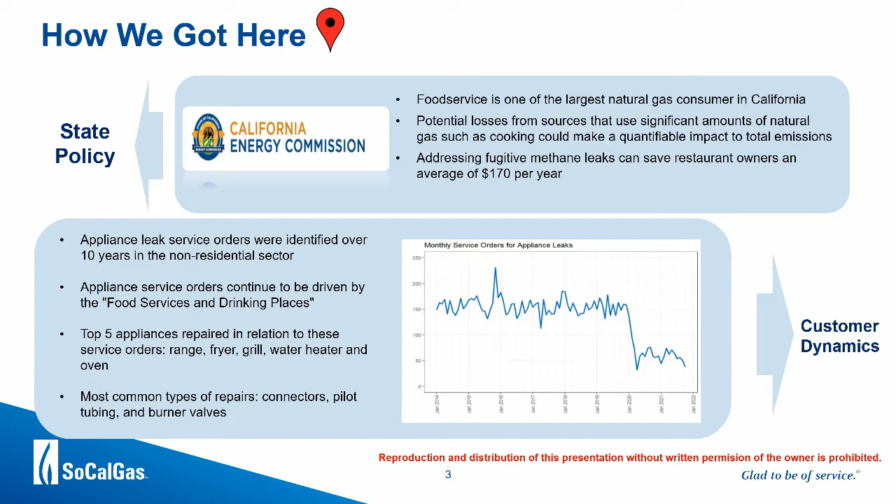So that was interesting. Going back to the CEC study, it shows that by addressing emissions in the commercial segment, particularly restaurants, while they're not a whole lot compared to other sectors probably, and I don't have that data, we can say there's a significant amount that this commercial segment or sector can save if we were able to address this.

So this slide basically proves how large or how important the restaurant customer is, and they do contribute a significant amount in terms of usage. We have a majority of them in LA County.

So what were we going to do knowing all this information? With that understanding, we've developed this plan, which is a proactive engagement to commercial restaurants. And how do we do that? It's about what are our goals or objectives?

It's about reducing methane emissions associated with gas leaks. It's about increasing efficient appliances and providing an incentive to those restaurants. And also offering an energy management tool that can help educate these customers to understand their usage and how efficient or inefficient their appliances are. This is basically doing it in a proactive way.

This is before something actually happens, you're addressing it right away. So in terms of identification, who would be qualified, or at least who we think would benefit from this effort, we developed a propensity model with the help of our consultant. We've identified restaurants that are more likely to request a service order associated with those appliance issues that I mentioned earlier.

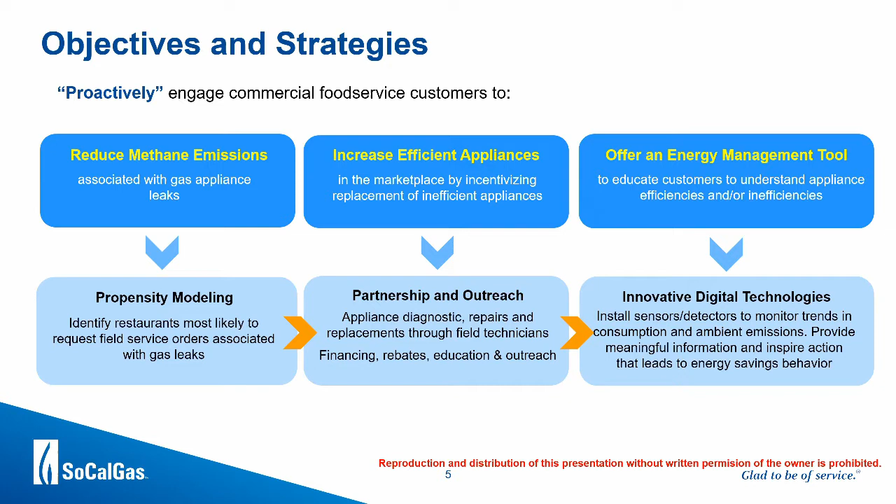So this project is not a one-team type of effort. It's actually a lot of groups and teams helping us put this together. It's a collaborative effort that supports our mission of clean, safe, innovative, and customer satisfaction.

I know this is a loaded slide, but it actually shows the process we're in. It's a step-by-step process. There are 4 steps here.

First is identifying those customers that are eligible to participate and inviting them to participate. Once invited, they are broken down into 2 groups: those with high propensity to have issues in their kitchen, and those with lower propensity to have an issue. The approach is a little different for each.

For the higher propensity group, we send our technicians to do a sweep test, identify issues, and repair those issues. We're offering incentives, benefits to the customer, wherein we're repairing it. We offer significant rebates and a financing option if there's a replacement needed for the appliances or equipment.

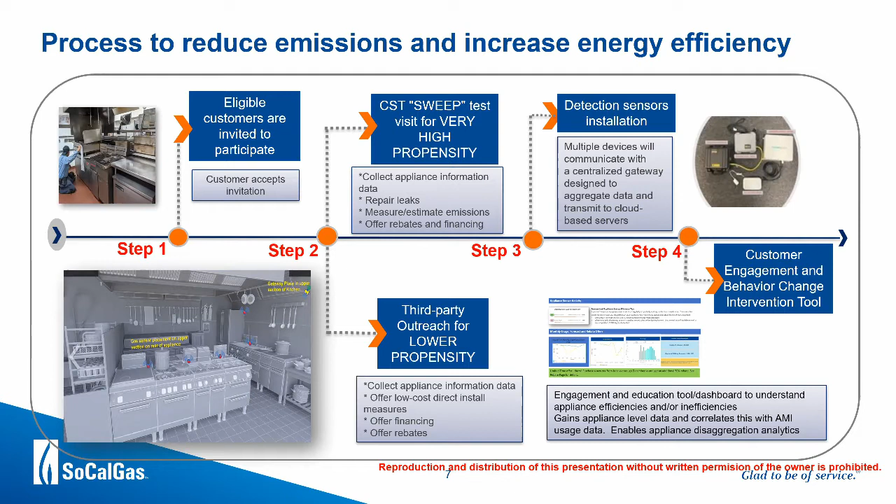So, milestone: currently we have 70 restaurants already enrolled in this project. You're seeing on the right-hand side an actual restaurant visit where we look at the kitchen. Our technicians go around the kitchen looking at the issues, doing a sweep test, and addressing these issues.

We've visited 10 restaurant locations with the field technician. 34 leaks have been identified, and the majority are basically coming from incomplete combustion, so there's a lot of maintenance these kitchens require. There are 21 natural gas appliances that we've repaired as of today, and 8 locations visited by a third party to offer low-cost measures.

The calculation here is preliminary, not finalized. We're working with several third parties to really establish and show how successful what we're doing is. I believe it's successful because, for one, we're detecting something that a customer didn't call us about. We're actually approaching them before they even call us, because they're probably not even aware of this.

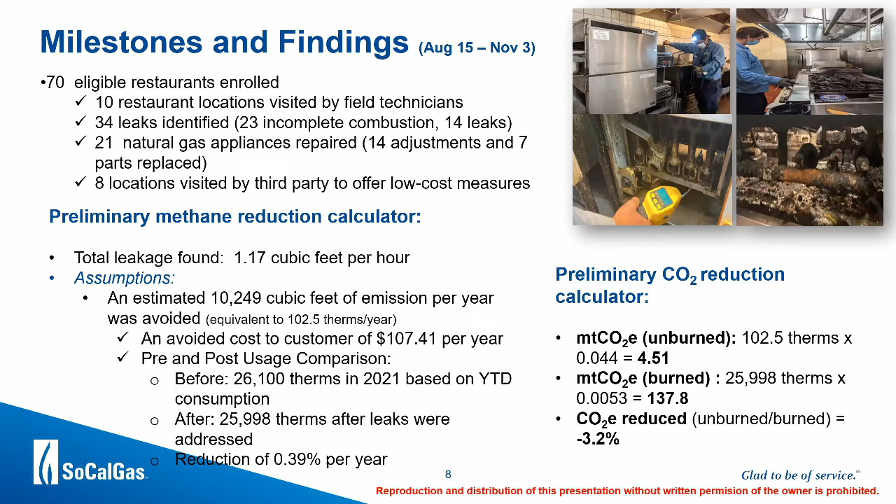This is a metric for success, because like any project, you want to march towards an end goal. Here's how we're looking at establishing it, or looking at whether this will be successful, since it is a test and learn project: quantifying the ambient methane gas emissions we've reduced, looking at usage, looking at the repairs we've done, and establishing the effects of goal setting or loss aversion.

For example, if a customer establishes energy saving goals and achieves them, they get rewarded for it. So there's more interaction. It's not just serving information; they're actually interacting with the information they're receiving.

It also enables us to enhance customer engagement and service. It's not a one-way communication but a two-way communication - delivering the information, they're interacting with it, and telling us also what we can do with that information. It's about the evolution of the model that we've developed.

So there's a lot of benefit also for SoCalGas: reducing leaks in the gas system, increased efficiency of customer equipment. This allows us to develop our business case to expand traditional energy efficiency programs as well, into the opportunity to pursue broader solutions. So this is innovative, and I'm proud to say I would think this is the first time this is being done.

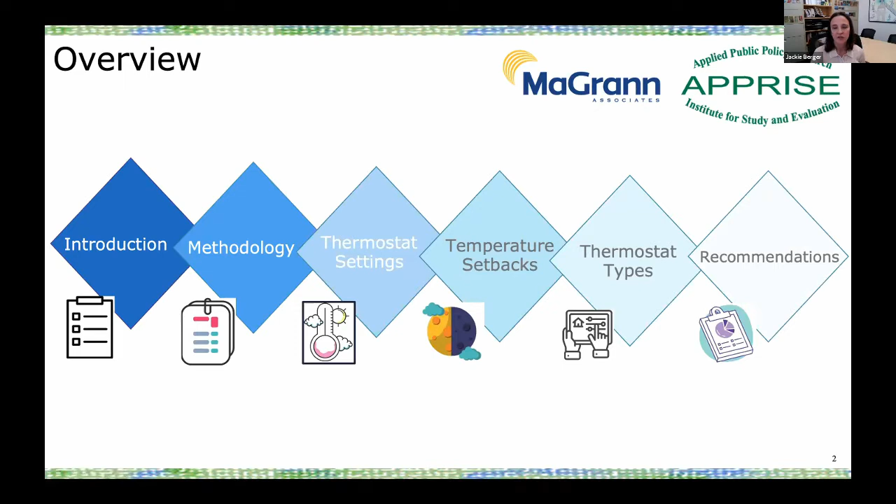So we'll be talking today about the study and the methodology for the study, and then I'll turn it over to Ben, and he'll talk about the results - what we found with respect to thermostat settings, temperature setbacks, thermostat types, and the recommendations that we have based on the study. Next slide.

So the goals of the study are to understand thermostat set points for households in the Northeast, to develop information on the use of setbacks in the winter and in the summer when households are away from the home and at night, to estimate the penetration of programmable and smart thermostats, and also to develop information on how smartphone apps and other features of smart thermostats are used. Next slide.

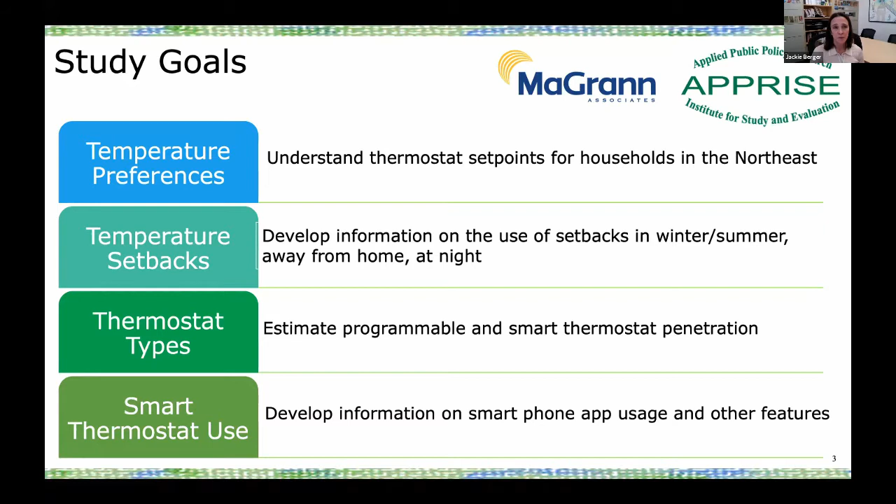I think it's important to talk about the methodology when you're understanding the study, to know what the response rates were, what the sample was, and how the survey was conducted. Next slide. So the sample that we used was a purchased address-based sample.

It covers nearly all US households, and we focused on the Northeast - the New England region and the Middle Atlantic region. We selected a random sample of 2,000 households, stratified by state. Next slide.

The methodology we used to implement the survey was that we first sent an advance letter that explained the purpose of the survey. It provided a link to complete the survey on the web, and a toll-free number so the household could call and complete the survey over the phone. It also notified the household that APPRISE would be calling them to ask them to complete the survey over the phone. When we sent the advance letter, half of the sample was sent a $5 bill with the advance letter and half was not, to test how that impacted response rates.

About 25% had an email address, so they were also sent an email with the same information as the advance letter, and they could click right on the link to complete the survey. Then we made calls to all of the households that had valid phone numbers, during the day, evening, and weekends. On average, 7 calls were made. After 7 days in the field, we sent a postcard, and after 12 days, we sent another email.

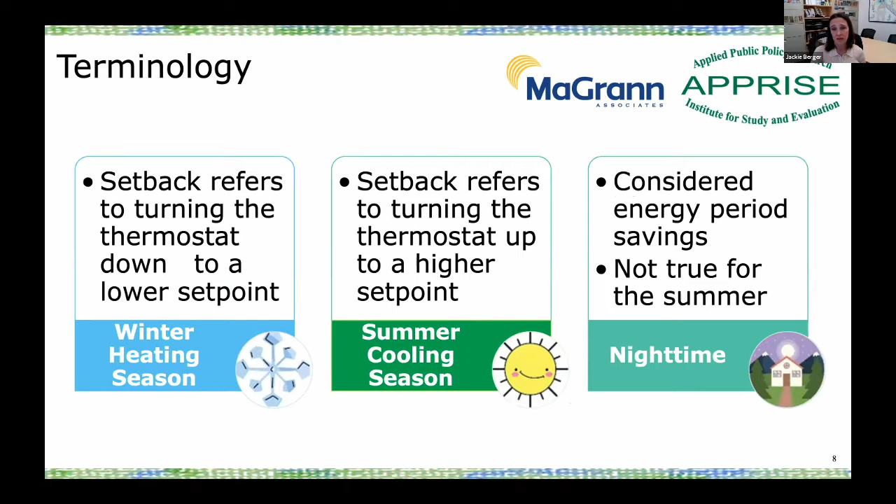And Ben will now present the results from the study.

Thanks, Jackie. So let's take a quick deep dive into what the data told us. And Dan, if you are able to put our audience question into the chat, I'll be referring to that later if we can do that. If not, that's fine too.

The average winter daytime temperature among all single family respondents was found to be 69 degrees. And that's right between the 68 degrees typically thought of as an efficient at-home setting and 70 as the default that many consumer-grade thermostats use. On average, households are using a lower set point when away and at night, so that seems like good news overall.

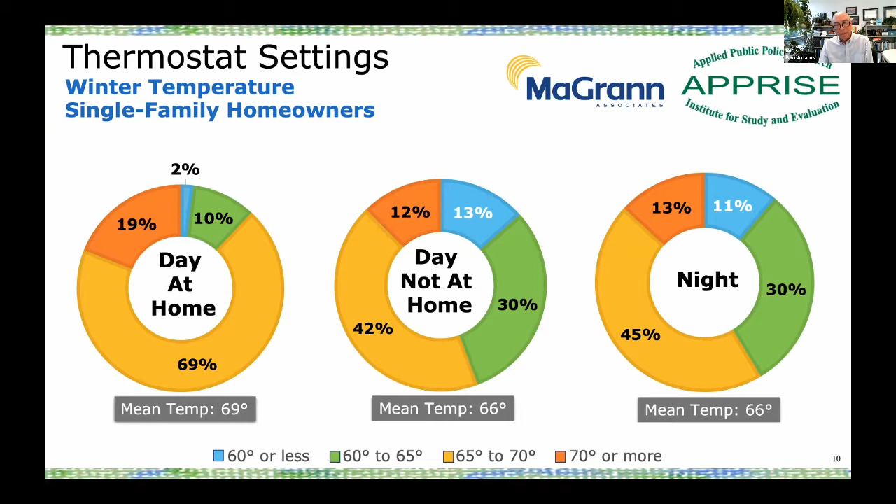But nearly half of single-family respondents are not practicing winter setbacks, and this increases to more than half among multifamily residents. Note that to reach the typical energy-saving default setback, that's a manufacturer default, of 62, a full 7 degrees of setback would be required, but only 17%, a real minority, are setting back that much.

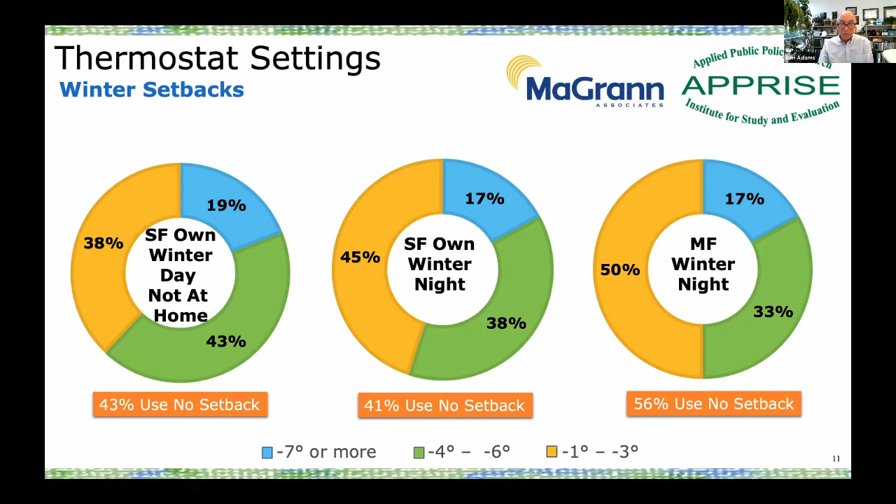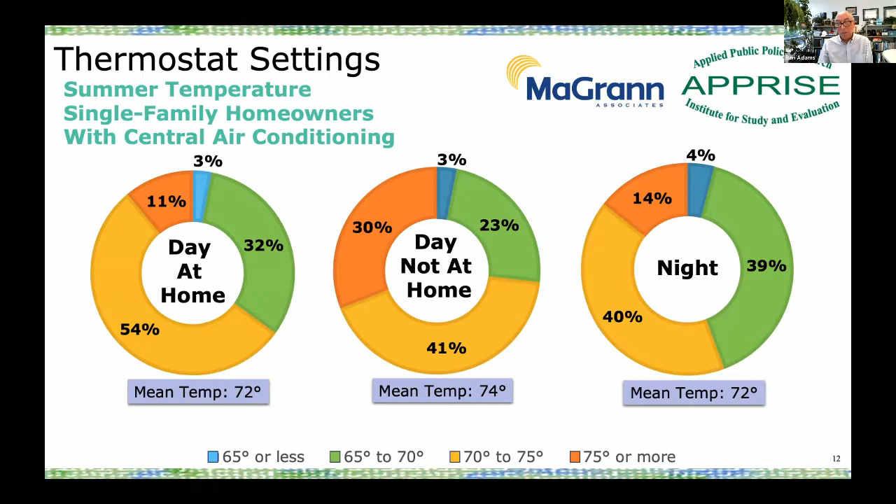Here we see that in summer, the average set points appear fairly consistent throughout the day, 72 to 74 degrees, regardless of occupancy.

However, even more households are not practicing setbacks in summer than in winter, meaning they're not modifying the temperature at all when no one is home or at night, more than half in both cases. And as Jackie alluded to, what's really interesting here is that about 2/3 of households report turning down the temperature at night in summer, meaning they prefer to sleep cooler in both winter and summer. This is actually the opposite from some conventional wisdom of manufacturer default settings that regard nighttime as the potential energy saving period in both seasons.

In reality, for 2/3 of the households that responded, the energy saving period in the summer is during the day, not at night. I'm just glancing at the chat to see... it looks like at least one respondent likes to sleep cooler, and that is generally what we found.

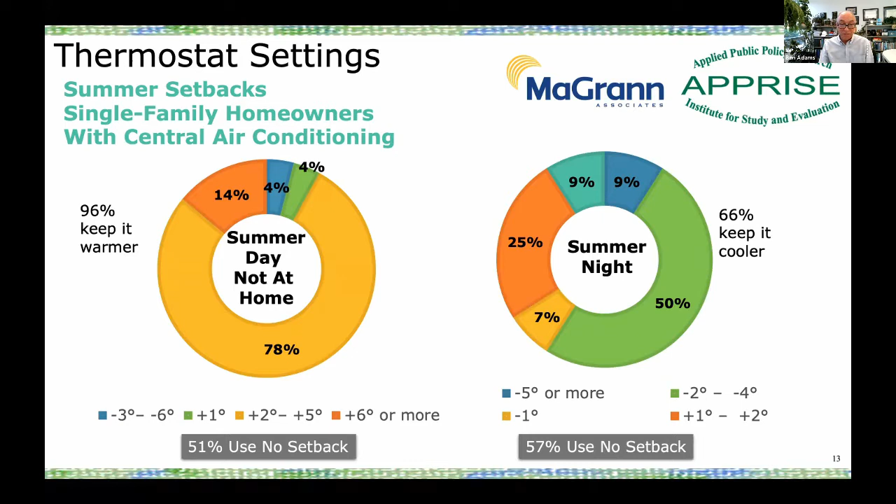Here we see that this appears to be compounded by the age of occupants. In each of these categories, households with an elderly member consistently report higher average temperatures for all periods, including at night in both seasons.

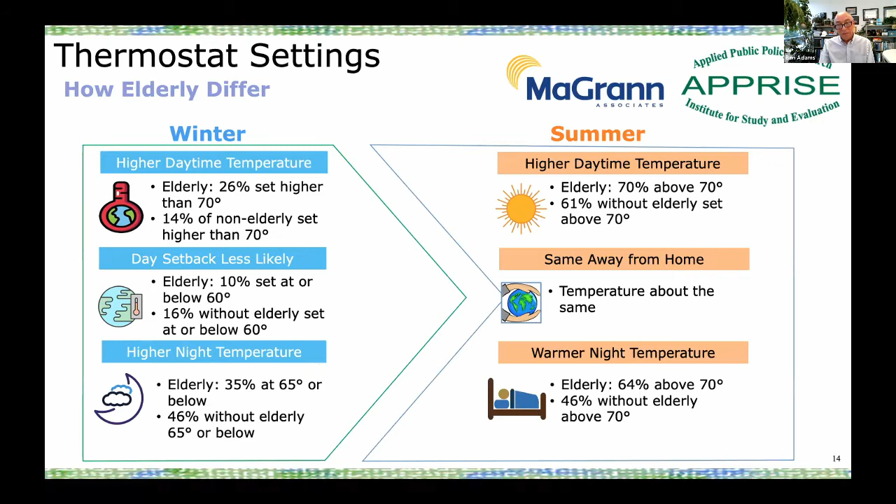It's worth noting that more than 1/3 of respondents reported that they do sometimes deploy uncomfortable set points in order to save energy, and that they were more likely to do so during the day. Only 58% said they never experienced this.

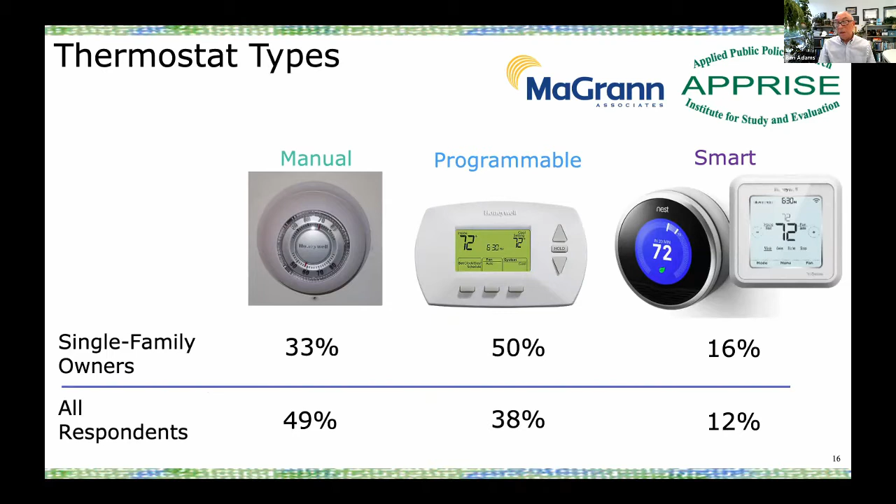But looking at the frequency of thermostats by type, smart thermostats still represent a small minority among the responding population. 16% is low, and multifamily skews that to 12%.

On the upside, smart thermostat households reported a substantially higher rate of setback in the winter when no one was home. So 71% setting back versus 51 and 59 for conventional thermostats.

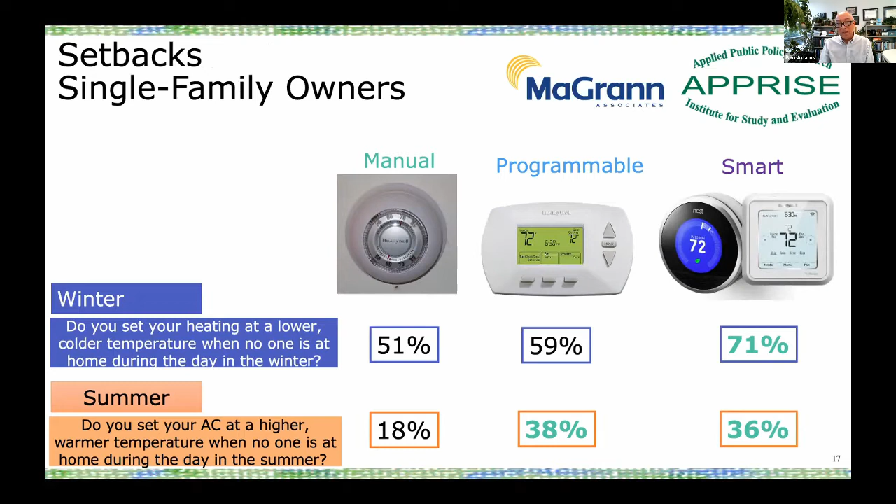In terms of our recommendations, we believe the data emphasizes the need to treat elderly and non-elderly households differently, and that it may be important not to activate a default energy saving protocol for elderly households in particular without speaking with them first to determine their occupancy patterns and comfort thresholds.

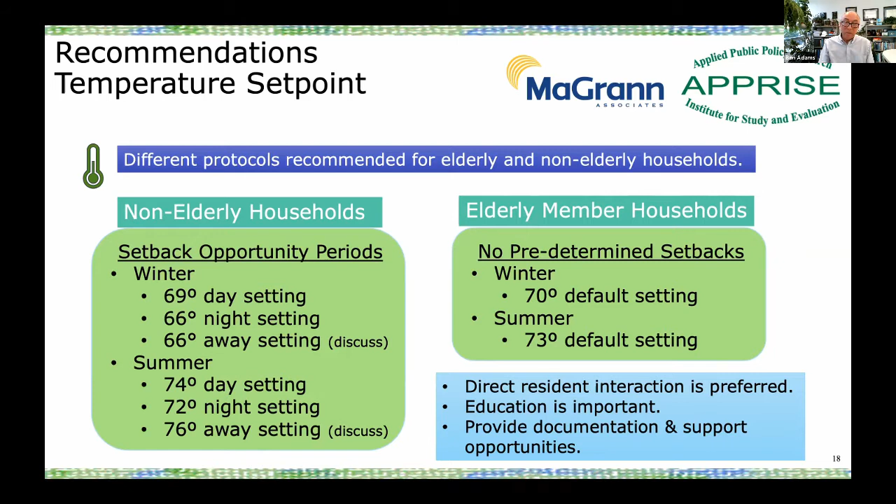Keep in mind that some households may already be conserving and may even be using more aggressive set points than your programmatic defaults, and that the best way to do what's right for the customer is to speak with them prior to making assumptions.

And have the installer set up protocols prepared in advance for a variety of different occupancy and demographic scenarios, so that they know what to do once they encounter a specific household.

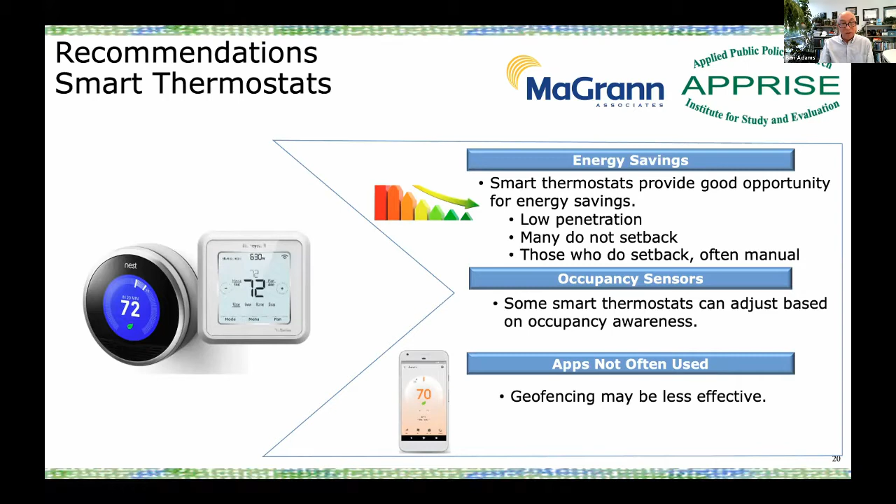So those are the highlights of our conclusions, and we'll be happy to discuss more at the end of the session. Thank you.

Thank you, Jackie and Ben. So, as always, really cool stuff. I'm going to introduce our next speaker, Tobi Elusakin, I believe is the way it's pronounced, but please correct me if I'm wrong, Toby. That was correct, that was pretty good. Okay cool, I'll call you Dr. Tobi for now.

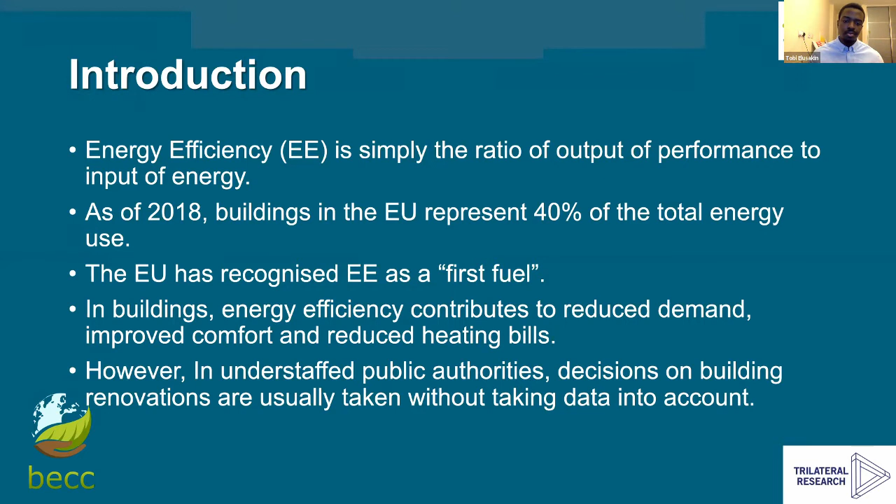For our project, EERAdata, what we found was that there was a lack of adequate knowledge and understanding of the impact of energy efficiency-based renovations on buildings within the EU. These impacts could go further than the economic impacts, looking at many of the wider benefits—health benefits, environmental benefits, impact on reduction in bills, on comfort, and things like that.

EERAdata aims to essentially operationalize the energy efficiency first principle. This means taking into account the cost-effective energy measures in shaping policy and making relevant investment decisions.

The project assesses multiple benefits that arise through these energy efficiency measures applied on single buildings. We have created a software solution and related databases which help municipalities, public authorities, and regions perform these assessments, to see the impact of investment in energy efficiency-based renovations, and also go a step further by comparing them to supply-side investments.

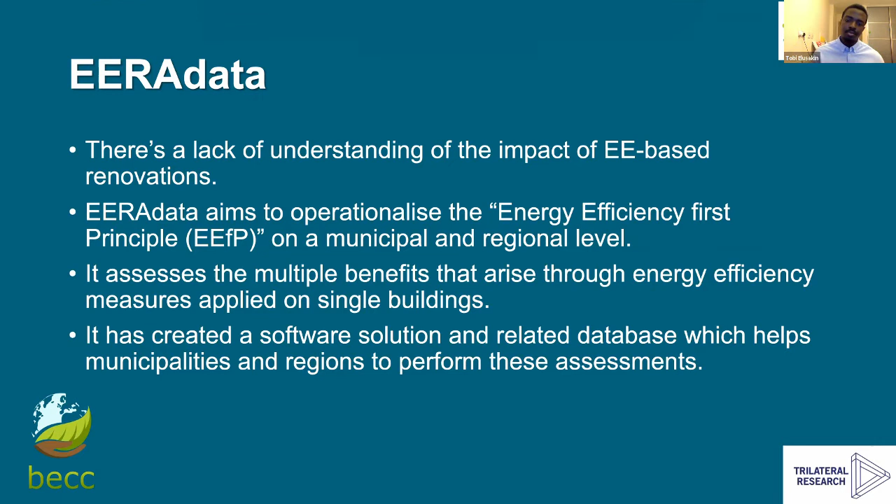As part of this project, we proposed a data framework, which helps with the overall goal of the project—development of a decision support tool—and helps with the assessment of the impact of energy efficiency-based investments by taking into account relevant building stock, energy, socioeconomic, and indoor environment data.

This framework begins with the definition of requirements based on different calculation models on which the tool itself is based. These models include the energy demand model, socioeconomic model, life cycle assessment model, indoor climate model, and supply side assessment model.

After that, data is collected, and for this project, we have 3 partner municipalities: the municipality of Velenje in Slovenia, the region of Andalusia in Spain, and the city of Copenhagen in Denmark. These 3 cities form our front-runner partners as part of our consortium, helping us to co-develop the tool and acting as our primary testers.

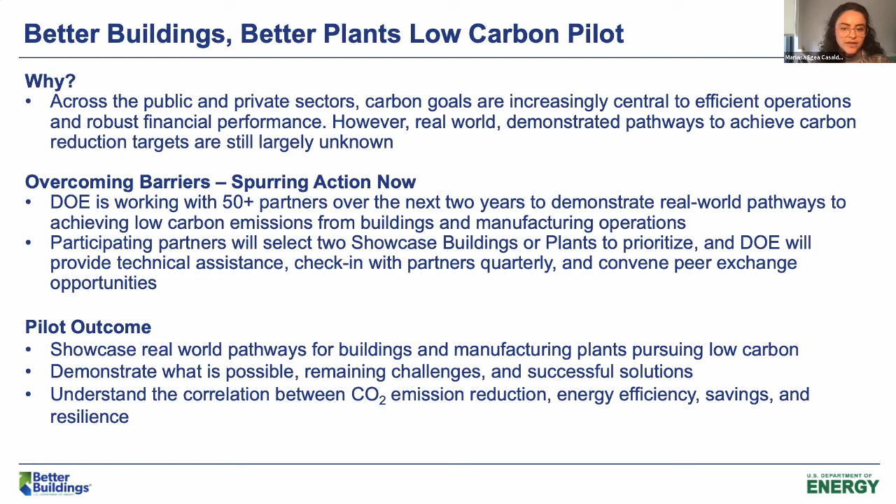Through this 2-year pilot, Better Buildings partners work with a team comprised of DOE staff and contractors, but they're also paired with national laboratory experts who provide technical assistance and help them establish baselines and set goals. The goal of the Low Carbon Pilot is to publish and broadcast real world pathways to going low carbon and encourage other organizations within the Better Buildings ecosystem and beyond to replicate them at scale.

Now, through the Low Carbon Pilot, the Department of Energy is currently working with 50+ industry leaders. Better Buildings is a free and voluntary government program that's primarily informed by partner feedback and input. We look to our partners to tell us about the obstacles they face out in the field. In return, everything they share with us informs our priorities, how we structure technical assistance, the resources we develop, and complementary programs we create to accelerate their process. We also use their feedback to inform DOE's investment decisions in research and development of new technologies.

And by celebrating our partners and highlighting their projects, in case studies or through the Better Buildings, Better Plants Summit, which is our annual leadership symposium, our team aims to encourage our partners to continue on this path and prioritize energy efficiency and decarbonization in their work.

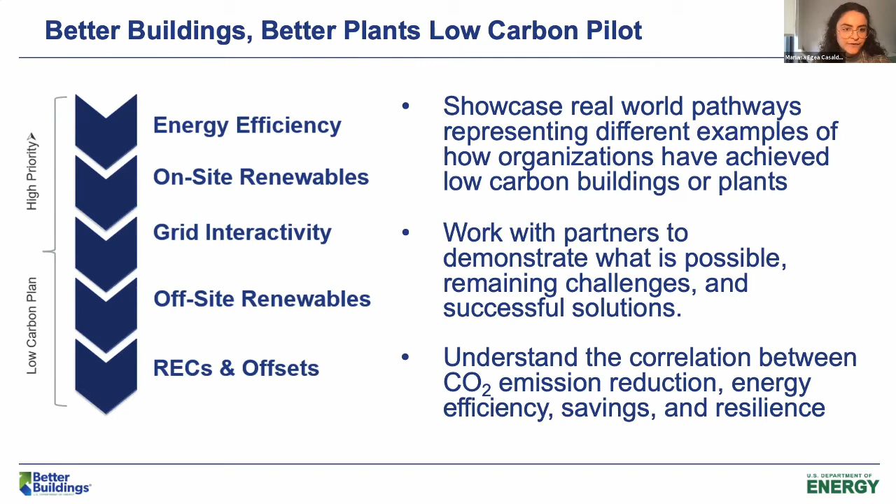These strategy documents supplement existing energy design guides developed by the Department of Energy, where new construction is a focus. So it's a complement to those existing resources. There are low carbon strategies currently available for 10 building types, with a supplement for commercial kitchen equipment. Recommendations are grouped by technology, with recommended actions categorized as either simple, intermediate, or advanced.

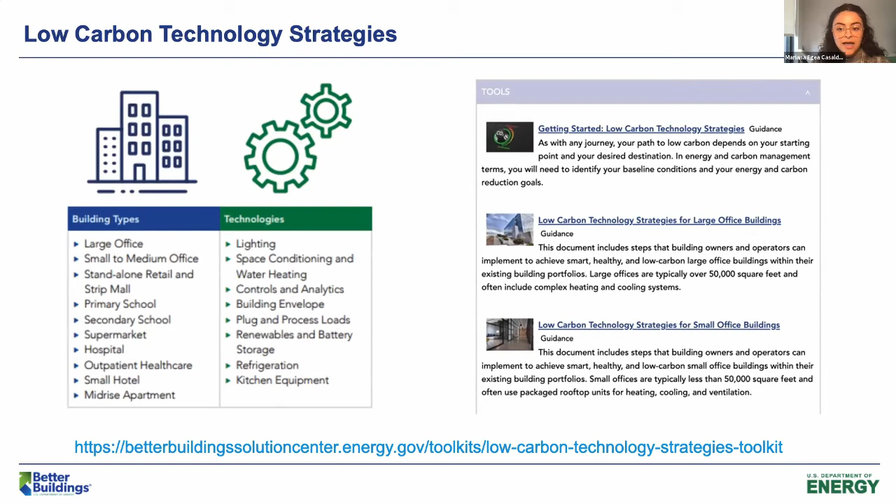And there are also a bunch of different workforce implications, including the fact that there aren't a lot of installers out there that have the skills and knowledge to successfully carry out a heat pump intervention. And this is why we're currently developing an additional resource that is a basic but comprehensive resource on the decarbonization of heating, which allows commercial owners and operators to identify key considerations and available technologies based on their current HVAC and water heating systems in existing buildings.

Okay, thank you, Mariana. So at this point, we are done with the formal presentations. Didn't have a chance to change my hat, sorry. But could I get all the speakers to come back on video?

And right now there's a couple questions for Mariana. I think we'll just ask them in the group here before we break out. First question, I think it's from Oriane or Oriani: Why is the DOE not partnering with K-12 schools on this pilot?

The DOE is 100% partnering with multiple K-12 schools on this pilot. There are a lot of different sectors represented, including K-12 schools, hotels, hospitals, retail buildings, manufacturing facilities, utilities, and local and state government facilities. Schools had a really difficult time during the pandemic and these last couple of years, and they're definitely a priority for us here at the Department of Energy and in Better Buildings.